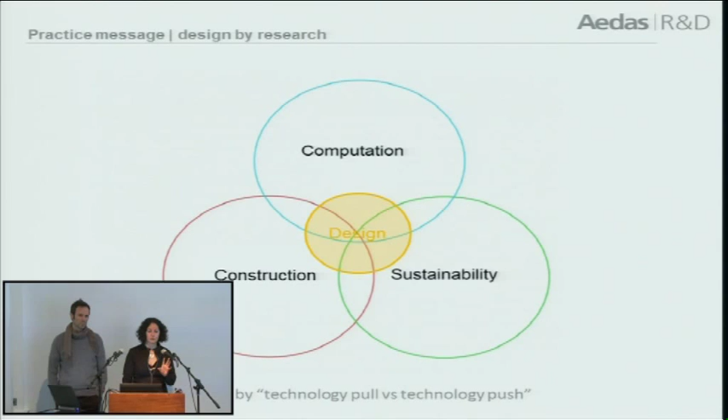Our sphere of expertise was very much based on computation and computational design, which Christian is leading, and sustainable design, which I took a strong interest in, and construction and fabrication, which we're both really interested in. We always end up working somewhere in between, and the most interesting bits of work we've done tend to be in the overlaps of these.

A very early project I did many years ago was the Dubai Metro geometry. You may have seen images of this project. Parametric modeling is my background in architecture, and Hugh Whitehead, sitting in the back row, who's been a great mentor, would probably see a lot of influences in that.

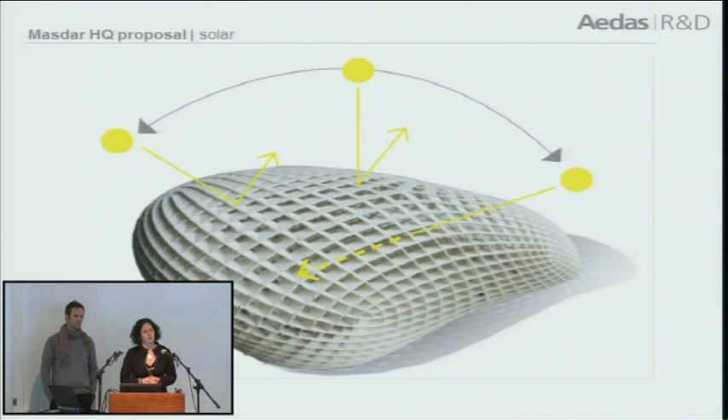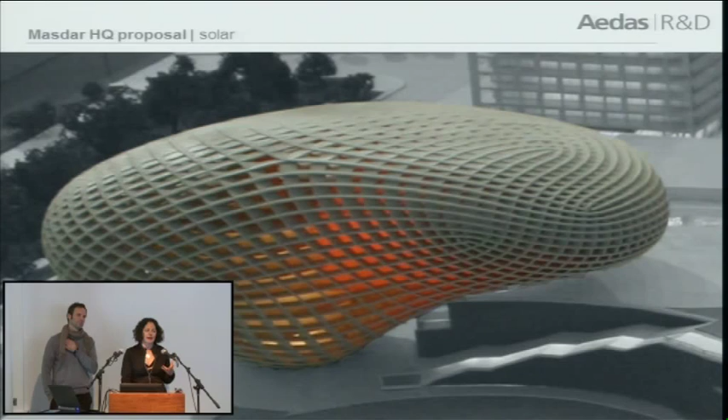That was a project we worked on in 2006, and since then we did a lot of work on building envelope. You'll see from these examples that the allure of a sculptural form, and then looking at how that performs, has been very much the focus of our early work.

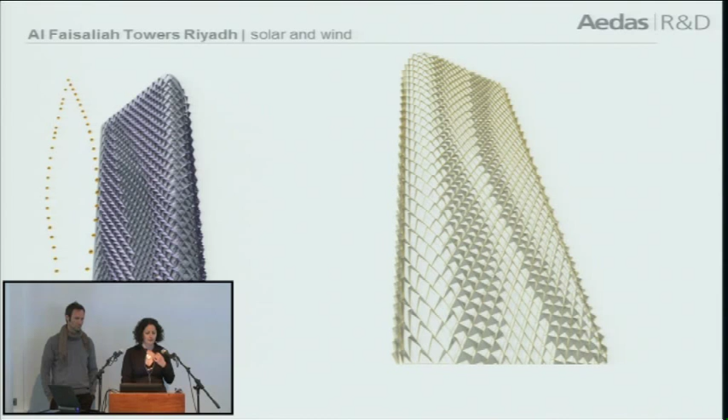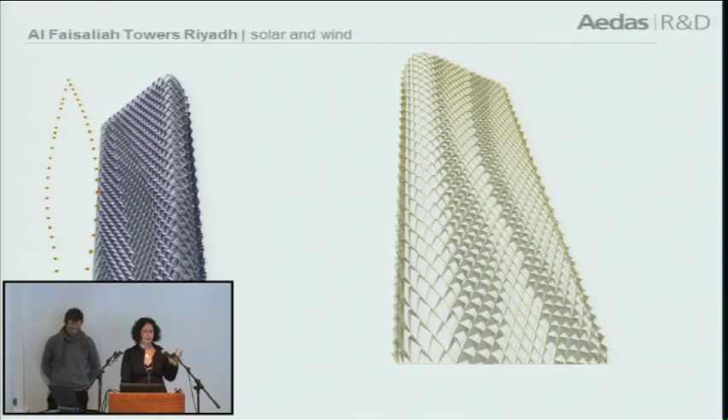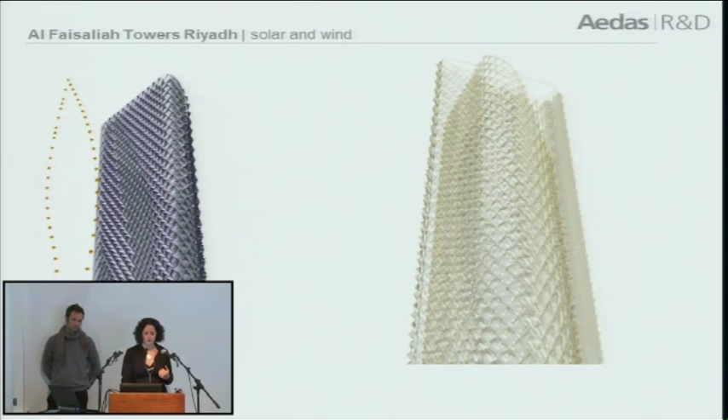Another example: working in Saudi Arabia on a tall building, we wanted to make the facade in a form that actually draws the prevailing winds into the shading system, because doing double skin facades in the Middle East is a bit tricky. We began working these sculptural aspects into the building envelope itself.

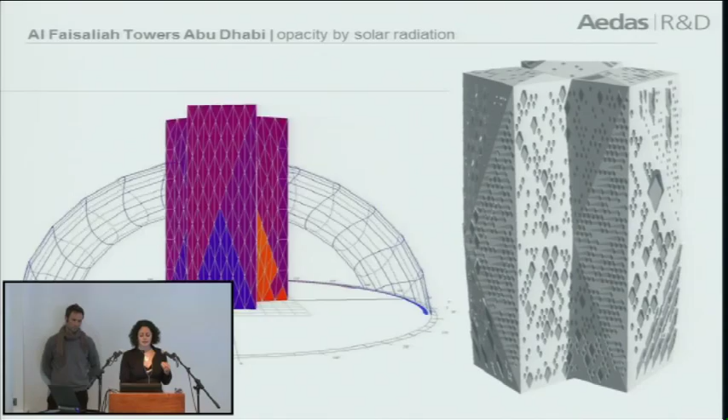We also wanted to look at solar radiation and actually drive the distribution of percentage openings around the building facade by the amount of solar radiation that particular facade is going to be subjected to. That was a building in Abu Dhabi.

When I worked on the Karachi Port Trust Towers, it was the first time I really wanted to know how much we were really saving by all this effort. We were making a huge amount of design effort—are we really saving anything, or is it just adding to the character of the building?

If I go back one slide, the thought that a parametric model can give you feedback about wind performance, can help you optimize the geometry, structure your data in a helpful way—you can do your environmental analysis as well as your physical prototype.

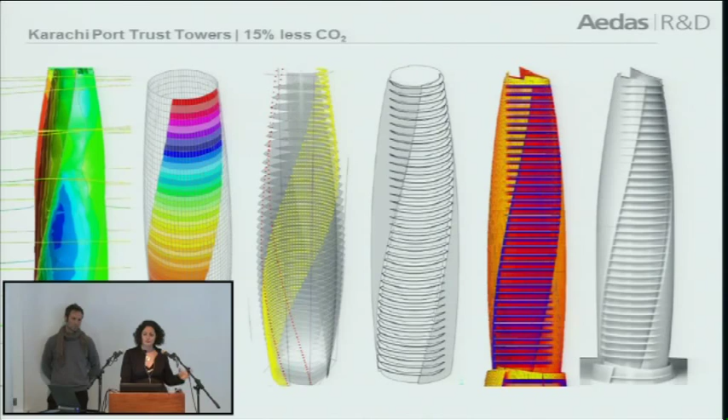So, 5 years ago, this was quite interesting. But being able to tell that it was going to save us 15% of our CO2 emissions was actually quite forward-looking. Al Bahr Towers, which is due for completion this year, was quite a bit more of a challenge.

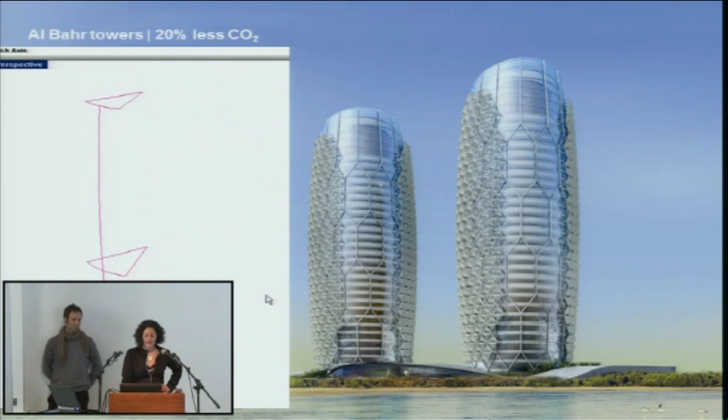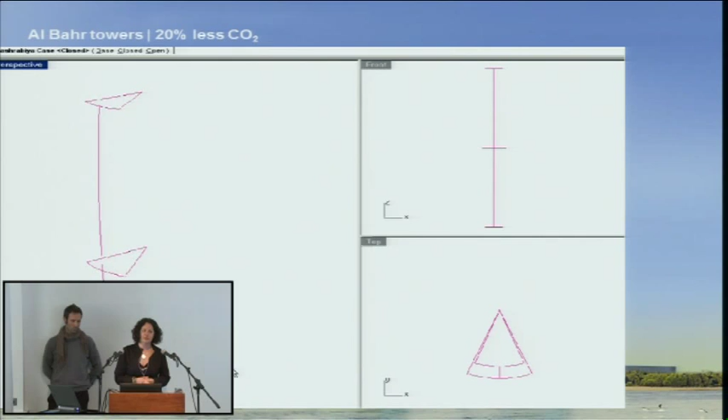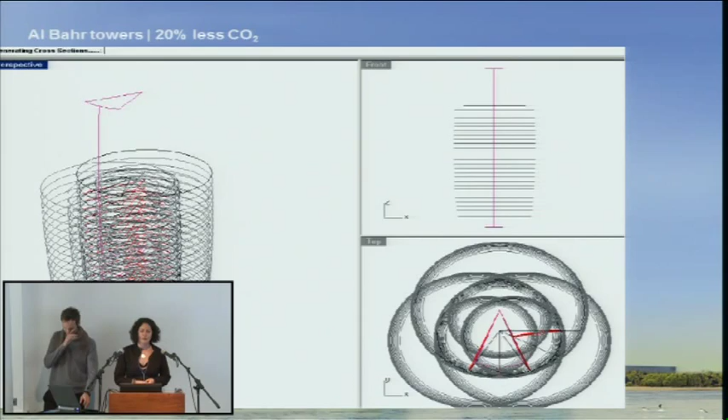You'll see from this animation, again using the parametric tools to structure the data about the building geometry, its efficiencies and the rest, so we can output this information for smooth production. We would never have been able to get away with building this building without the pure geometric control of the shape and being able to communicate that really fast.

I'm sure many of you have seen these types of parametric models since, but it was certainly a big step to actually produce the building, to drive the fabrication process from this model.

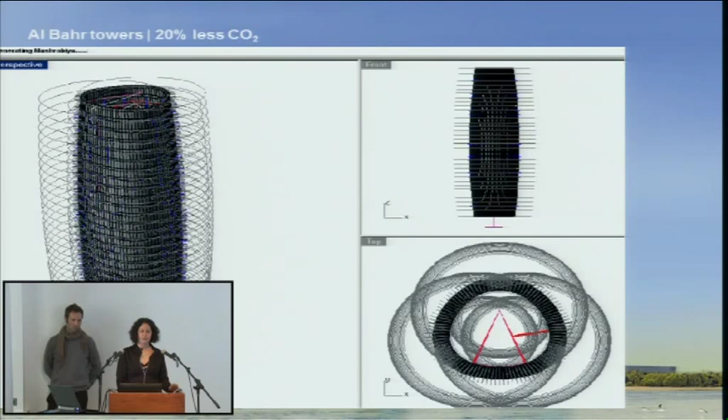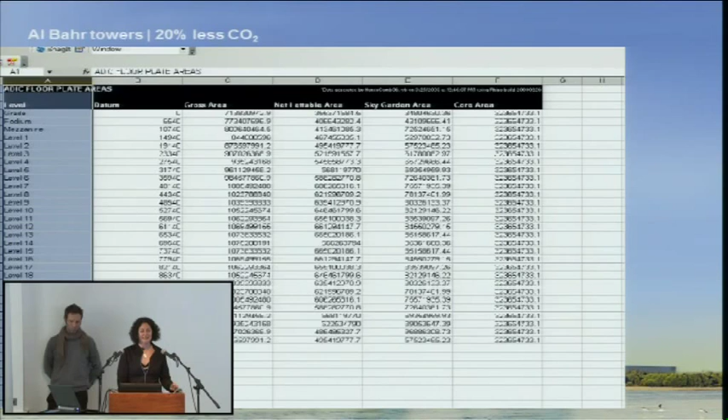The thinking behind the design was that the client very much wanted a transparent or glazed facade, and we were very keen not to end up with a glazed facade that is black or very dark, highly reflective, so that you have to turn all the lights on.

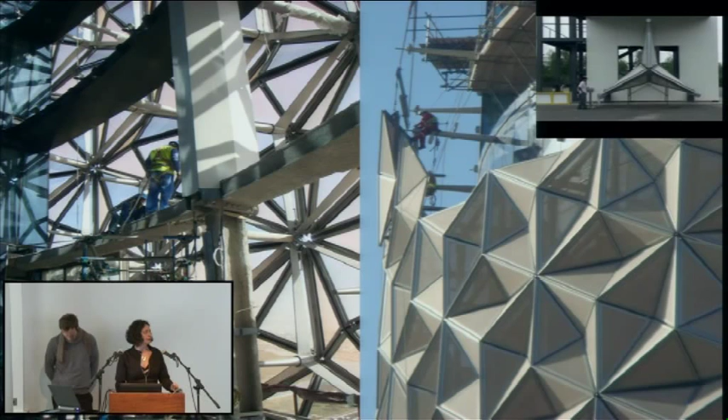Abdulmajid Karanouh, the lead designer of this project, a colleague of mine, has gone to huge lengths to make this happen. He's come up with a geometric louver system. You'll see in the corner the little animation of the prototype there. It actually changes shape depending on the solar angles. The aesthetic effect is that you can actually see through the mesh quite clearly from inside, whereas from the outside it looks rather solid.

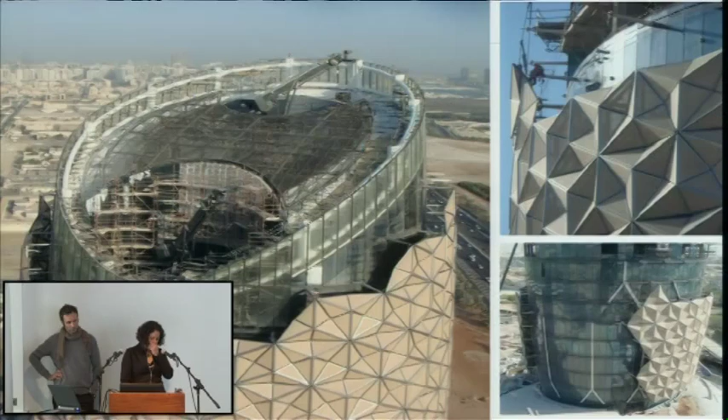And some of the recent pictures from the site. The animation is not running yet, so.

So one of the thoughts we had at the time was, if we invest so much effort into the building skin... water. Some water. Sorry, I've got a cold.

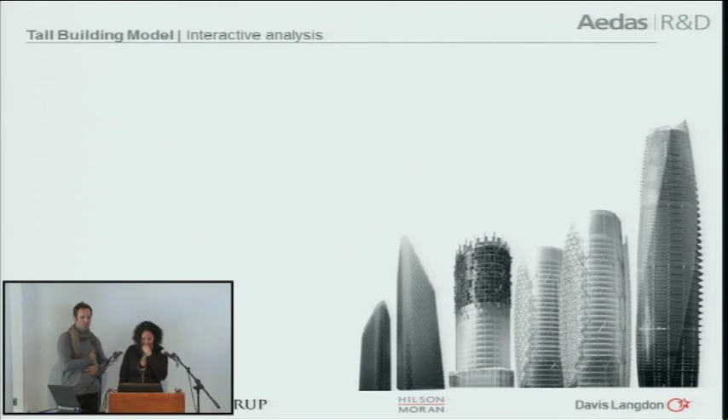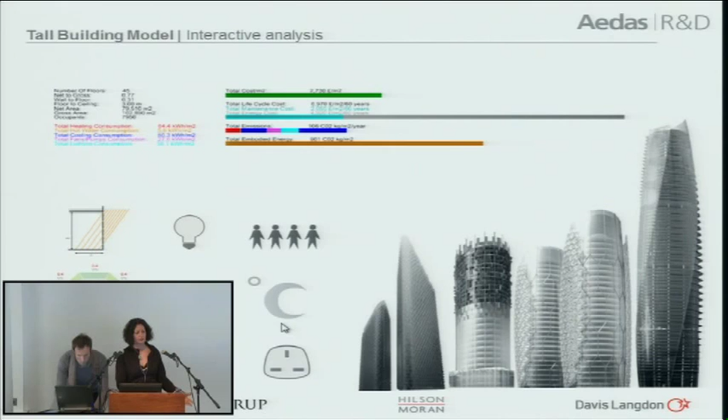We'd really like to have feedback not only about the carbon emissions of the building, the energy consumption, but contrast that with the embodied carbon, shown in the bar here. And then we'd like to see how that compares with the capital and whole life cost. We've devised a model, shown before, the parametric tall building model, where you can change floor-to-floor heights, facade specification, complexity, lighting strategy, occupancy, set points, etc., and get very rapid feedback about all these factors.

It was a collaboration between Davis Langdon, ourselves, Arup, and Hilson Moran. What you saw there was us having to map the complexities of all these disciplines together. Normally when you make a model, you send it off to a consultant and wait for the response. By the time it comes back, the conversation is over, decisions have been made, and it's much more expensive to revisit those points.

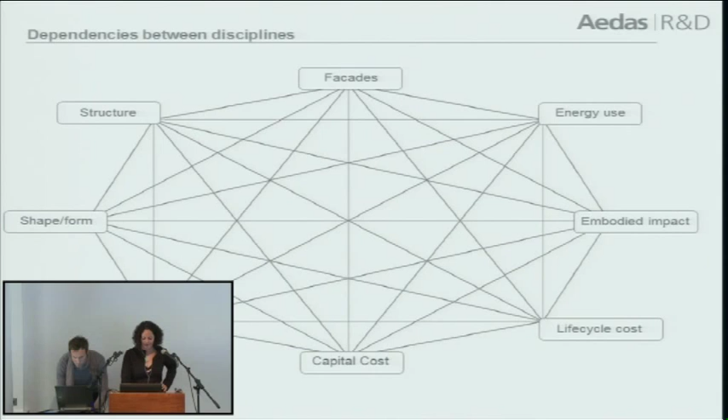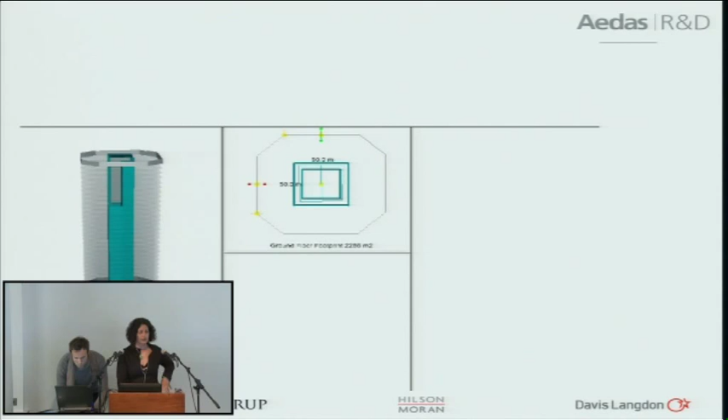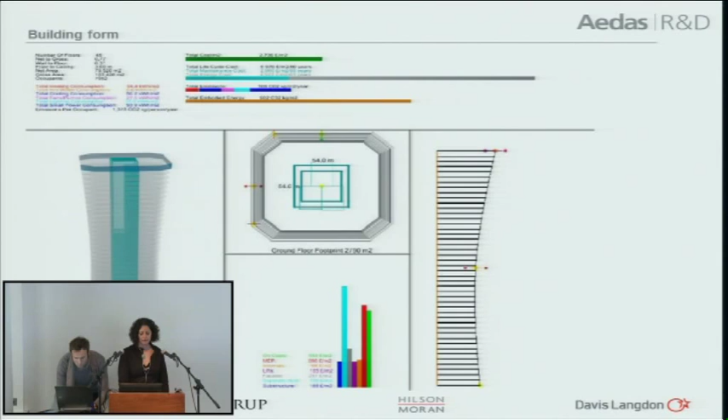Downstream, so we wanted a model that gives us the ability to make early stage briefing decisions much faster. You can put in the footprint, and the model then generates an extruded shape, which gives you the usual outputs, based on real quantities. You can change the shape of the building, change the height of it, and see all these parameters update.

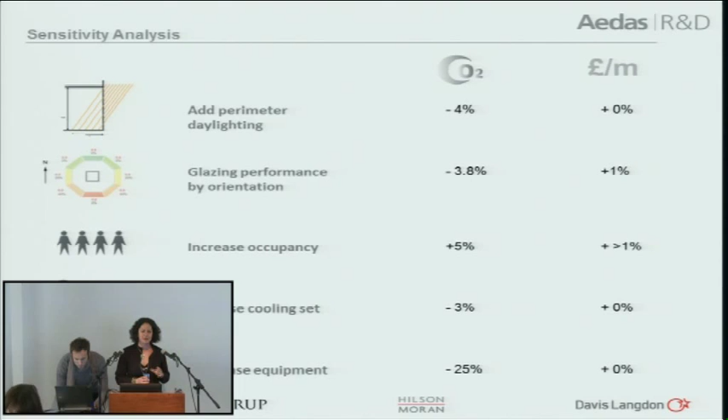You get an idea that proportionally, for example, if you add perimeter daylighting, you can reduce a certain amount of carbon emissions per annum. Doing the glazing performance by orientation rather than the same cladding all around the building, occupancy, the cooling set point. What was really interesting to me is when we incorporate what we call unregulated energy, the appliance loads, you can save a hell of a lot more.

And then the value model. Someone developing a design for sale will be looking at very different indicators than someone developing for an owner-user, as many of you may have come across. And when a project is funded by government, the most important driver should be what additional value that building brings to its neighborhood.

And very often, when we work with clients developing for sale, we're trying to bring more of that downstream value into the project. We did a very interesting project with Stuart Lipton from Chelsfield, with the same partners, evaluating the whole life aspects of different systems.

I'm not going to talk too much more about this, but the easy answer is which system basically has the biggest advantage in terms of occupant comfort, adaptability, net area, capital cost, whole life cost, embodied carbon and operational carbon.

We're really beginning to set up this workflow as a result of these projects, where we can evaluate these aspects much faster than we used to, using computational and other techniques.

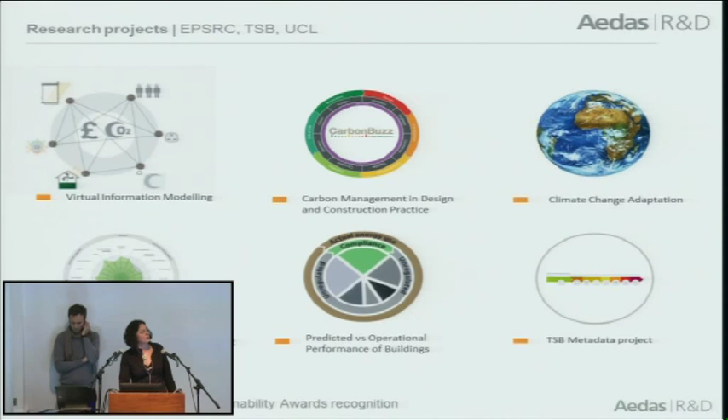You'll see the research projects that have arisen out of this line of investigation. We're working with the EPSRC and the Technology Strategy Board and University College London on virtual information modeling, carbon management in design and construction practice, and climate change adaptation. I'm going to talk about a couple of these.

One is going to be Carbon Buzz, which came out of this really intense focus. The incredible effort we put into these buildings to achieve real low carbon performance - does that actually happen further down once the building is complete?

Having set up this platform in 2008 to allow people from both the architecture and the broader built environment profession to gather and publish data online, what you can see is that buildings' compliance calculation or initial estimates of energy consumption tend to be less than half of what the buildings actually emit in terms of carbon in operation. That was quite a shocker, because we do all this work on different parts of the building, but how can we really gauge whether overall that's what matters, and how accurate are our assessments and predictions?

One of the focus points of the Carbon Buzz project is to identify the risk areas that stop buildings from working the way we expected. For compliance, you look at a building and benchmark it against a building with fixed operating hours, fixed number of occupants, and a very specific building fabric. You ignore everything about what happens downstream - is the contractor going to install the windows you specified? Is your air tightness going to be what you expected? Is your ground source heat pump really providing 40% of your heating, or only 2%, as we've seen in some examples?

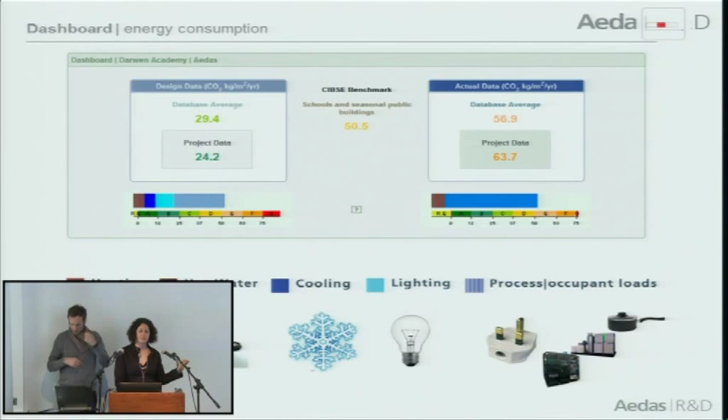For example, Darwen Academy was a really short study. The predicted versus operational energy consumption is not too different, but you'll find that with a very short study of a building, it's really hard to establish where the energy is being spent - on heating, hot water, cooling, lighting, process loads, or the rest. We would like to get to a point for every single design project in the practice where we establish this prediction a lot more accurately with all the risk factors attached, as soon as possible in the design, and work with our clients to mitigate those risks.

Another building, Loxford School - you'll see the prediction was a fraction of what we ended up with in operation, almost 3 times higher. There are some very good reasons for that, including the ground source heat pumps, which only supply 2% of the energy. And then there's the question of how you communicate this information to school children.

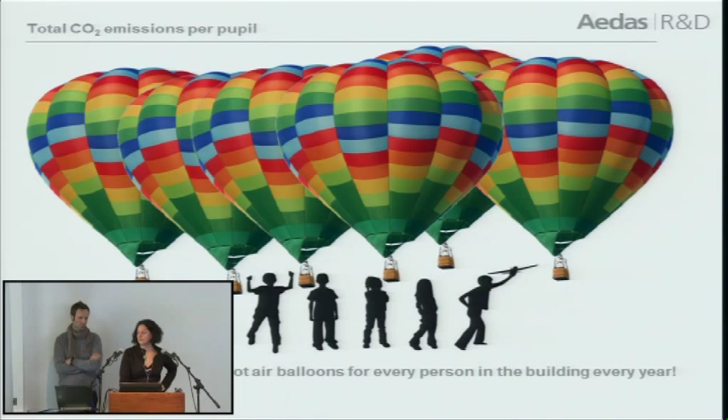I just put up this slide because it's a completely different type of conversation you would have with building occupants, showing some of your engagement work. It's really fun.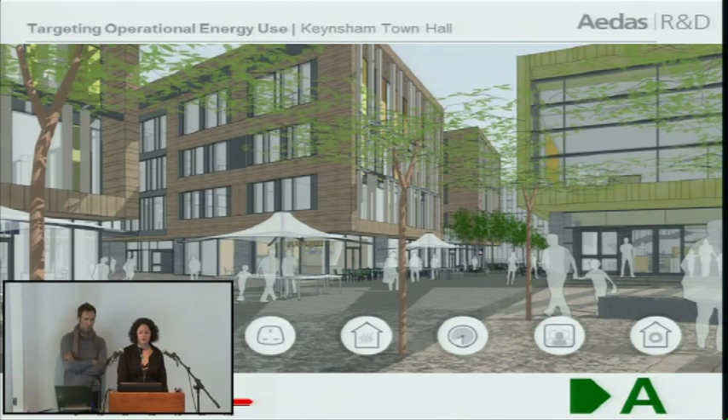In this case, we had a relatively easy time because we worked with a client who was very well informed, and they were the end users. It's much more difficult to do this when you work on a speculative project.

And you've heard me talk a lot about carbon, and Christian is going to talk about other things, not just carbon, when I let him put a word in edgeways. But the value of low carbon buildings - we know that regulations at the moment and design standards don't really contribute to the building's actual market value.

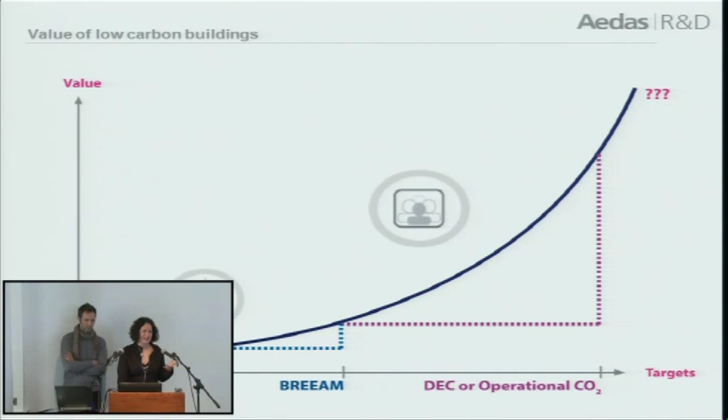But we don't know whether that's because the badge doesn't help, or because we haven't actually achieved operational low carbon energy in use. Most of the buildings we are studying, and also the building performance evaluation program, shows that the discrepancy between predictions and operation is really large.

So this thought of thinking about buildings as more of an ecosystem of fabric, services, equipment, with the occupant, the user, at the center of this. People do completely unpredictable, unexpected things in buildings, and we just have to build structures that are resilient to cope with that.

One of the things that a group of architects came together as part of a big event at our practice was we all thought, well, we must be able to design out building management systems somehow. None of the education buildings being studied under the building performance evaluation program have a building management system that really truly works, which is a bit of a shocker.

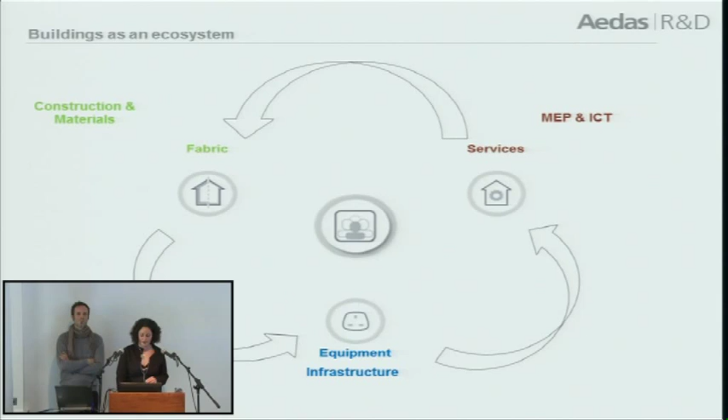So I'm going to leave you with a little animation, if it comes on, about doing things that aren't necessarily just about energy use, but studying what...

This was a little sculpture we did as part of last year's Smart Geometry program with Josh and Peter Feldman and lots of other people in the group, where we monitored the level of activity, so the intensity of the activity in different workshop clusters, and these things change shape based on how intense those activities are.

And that's it. Sorry, Christian, over to you - they're very patient. Let's see, we have to... it's okay.

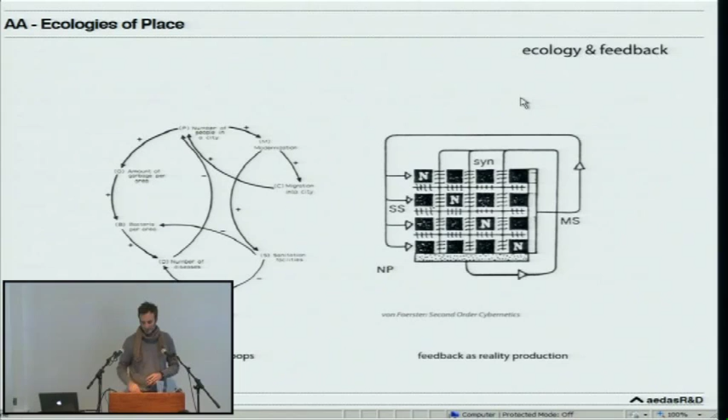And von Förster even went as far as saying that the whole set of realities is this idea of many feedback loops affecting each other - feedback in the sense that there's an ecology of feedback, an ecology of relationships to each other.

In an architectural sense, in a built environment, you could see that not so much always as the idea of structural systems, but in our perspective, the focus is the idea of the configuration of space and what's the ecology of the configuration.

And I mean ecology here because we have a lot of theory about the idea - amongst them here in London, in the UK, Bill Hillier with the idea of the syntax of space, or as he described it, space is the machine, all based on the idea that behaviors within the building are more or less down to its configuration, and the configuration or the behaviors are mainly based on movement or permeability structures.

Before Hillier wrote Space is the Machine and then The Social Logic of Space, they actually wrote the space syntax paper, which was meant to be a generative theory of design, based on 8 or 9 types of syntaxes, which all have to do with how to configure spaces as a mutual, or dual, representation between people occupying and producing space, and space affecting people again.

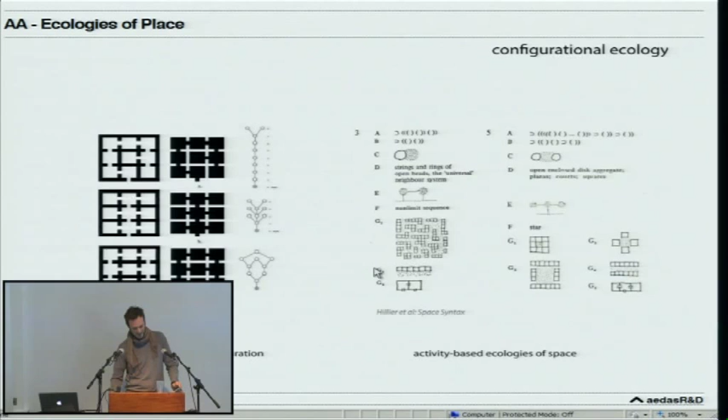This idea of Maruyama's feedback isn't necessarily explicit in design, because we can't necessarily design this feedback—we can only try to understand it ahead of it. So it's an activity or occupation-based ecology, if you like, between the geometry itself and the user. That produces types of local phenomena which are dependent on a global performance, which, according to configurational theory, depends on the permeability structures—how you get around and what you see when you go around.

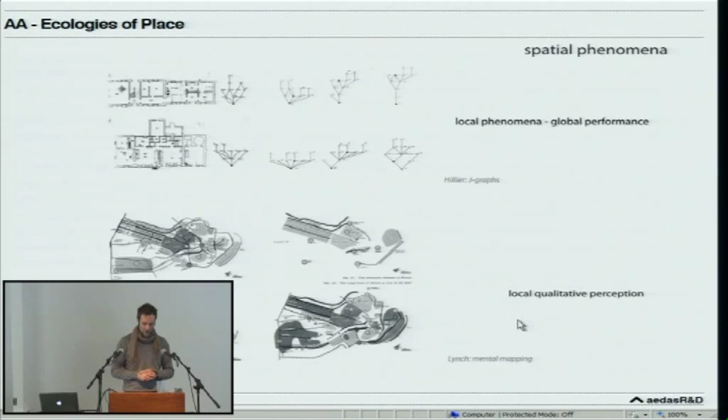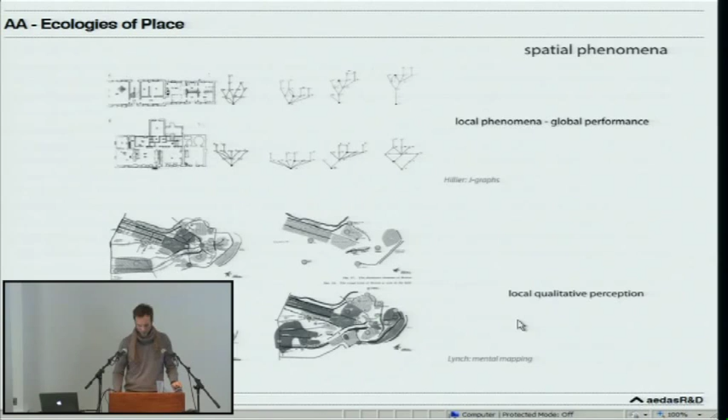It's becoming more intense and rigorous nowadays. We're not just looking at movement anymore, but also other perceptive qualities of space. We're going as far as simulating some of Kevin Lynch's mental mapping through associative maps, which we sometimes use for more narrative-based planning, which I won't be able to show here today.

In the planning environment, it's interesting that the UK—maybe one of the few countries in Europe, or worldwide—has moved away from writing design codes as rule sets. After the disasters of the 60s and 70s, where it was very parametric, they've moved toward specifying guidelines for what they call principles, or as the By Design guide would have it, planning objectives. How you then implement and arrive at these planning objectives or design principles is often not very discursive or explicit.

We experienced that firsthand, and it gave us a bit of a shake in 2007 when we did this project for Urban Buzz called Smart Solutions for Spatial Planning—beautiful name, not very good—working with various planners, regeneration officers, and urban designers.

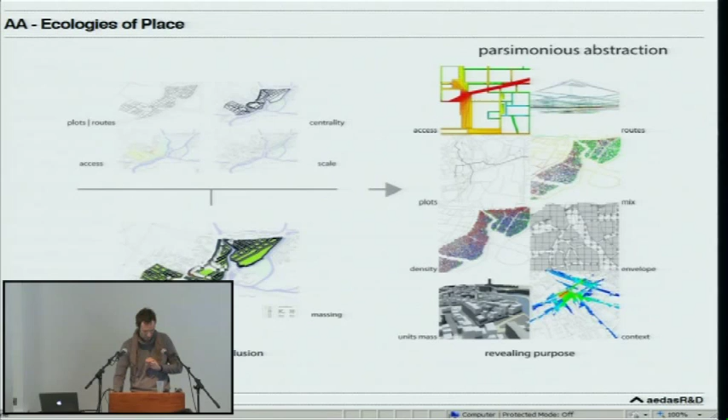So ever since, we're extending what we call on the one hand the digital master planning platform, and on the other hand a framework or platform of many very small, parsimonious simulations that only ever try to do one thing at a time, never more than one, because then you don't see the purpose of the application and it's very difficult for design to participate.

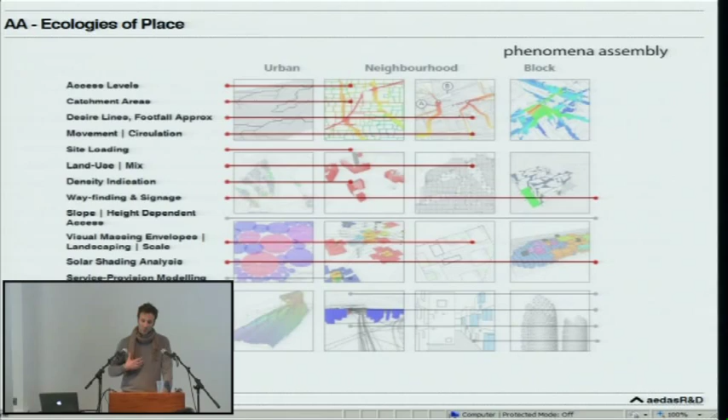So at this point, because I only have one minute, I'm just going to go very briefly into a couple of applications. Well, actually I've written down 5 applications, but I can only run one. I won't talk about the project itself, so that you maybe get a little bit of an inkling.

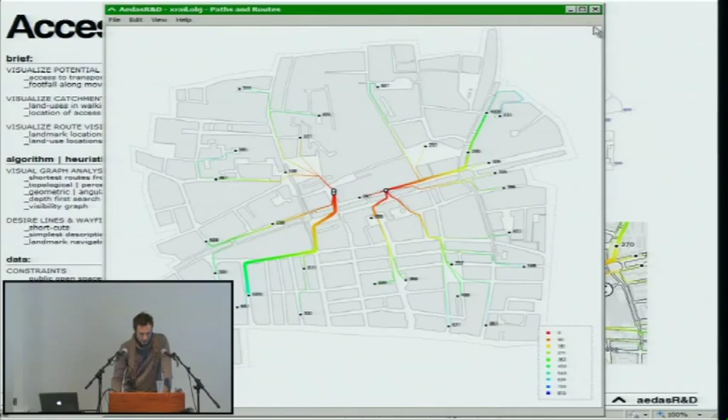From a movement perspective, we wrote a series of applications back in 2007 and 2008. We were then approached by the Crossrail consortium after they'd seen what we've done, because they realized that when they usually work with their consultants about routing and pedestrian flow, all they get is tables and access data, so footfall at certain points. So what we tried to do then is use some of these algorithms we work with and whittle it down to one type of behavior.

You can see here these were actually station entrances, so they had to try to find out in Whitechapel where the entrance should sit. And these are the sink points, meaning where people go to, taken from interviews that we conducted on site about where people come from during the day.

So we're doing the observational studies ourselves. You can then see, from certain points where people come from, you can seed them and give them how many points they need to reach. The colors indicate the distance, the width indicates the footfall, and the lines themselves are calculated by different types of criteria.

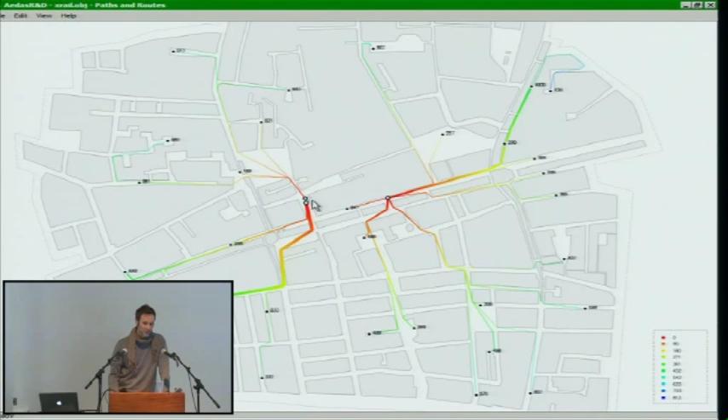So this one here would be: okay, if you're in the morning, everybody knows the site and there's rush hour, everybody runs to the access point of the station. These would probably be the shortest routes, i.e. how is our urban environment then occupied by choosing these locations for the routes? Or which entrances, as you can see, are not relevant, so I can actually take them away.

On the other hand, this is Whitechapel Market during the daytime, where we're going to have a lot of tourists coming in. They're going to use different routes. So at this point, I would actually have to find new ways of placing these departure points. But the routes become different types of definition through the environment because of the way that we read space the first time we go through it. It's called perceptive depth rather than metric depth or distance.

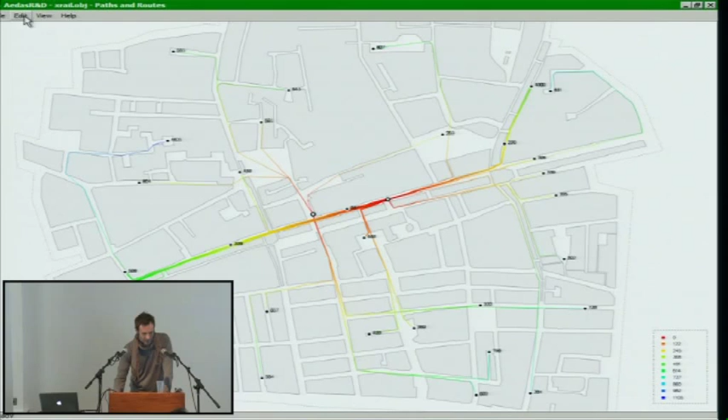So you can see how the city is going to be occupied differently from that type of scenario during that type of day. And sometimes I just like doing this for fun. You can see a little bit that the complexity we always talk about can actually be somewhat seen, if you like.

If you actually see the structure of the space, you can also see the relationships between the entrances. There's not much going on over here, depending where I place them. And I can see how my whole city changes its occupation.

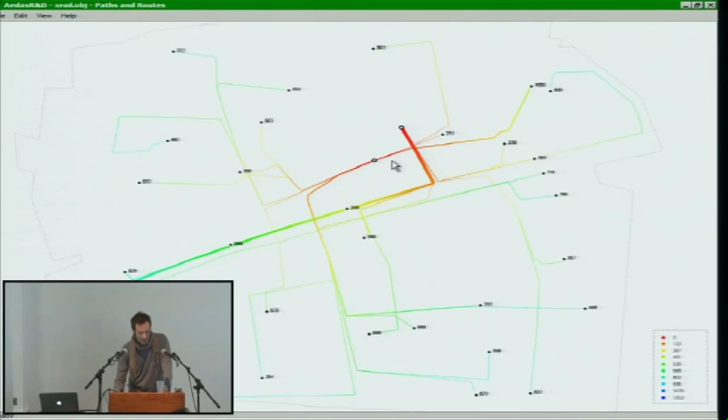We take that then into, of course, you can do that in 3D. So we did that for Masdar in 3D because people need to be walking in cool spaces rather than hot spaces. But what we're trying to do more from a perceptive point of view in using the space...

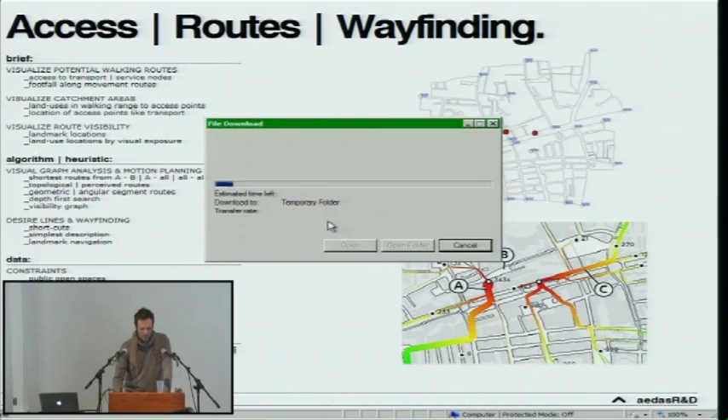We're also then analyzing, once we have looked at the routes, what people see as they walk along routes. So this is again a simulation, and none of this is ever recorded, what we're doing, so it's always live, in order for you to be able to interact with it and work with it.

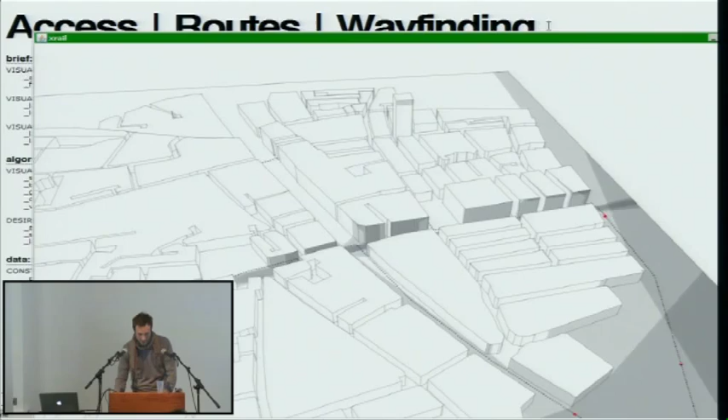What happens here also has several consequences. Underneath, it's actually building up a gradient map to show what is being seen, how often, which building, which elevation, for wayfinding, but also for allocation of land uses. Mainly these two points, but also in this case it was very important for informal crossings, where people would like to cross the street rather than where the crossings are allocated. So it becomes a whole series of issues that we break down so you can see the calculation or the behavior of the application.

This can then be transported if you want to go more abstract, which is currently not really the case yet and we haven't really used it too much. But you can see something like this, where you can try to understand.

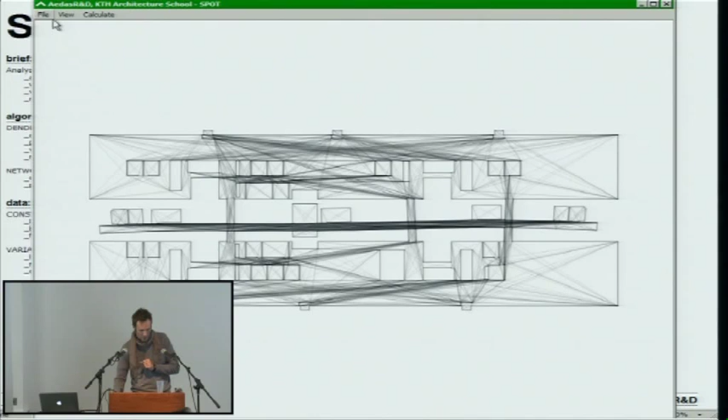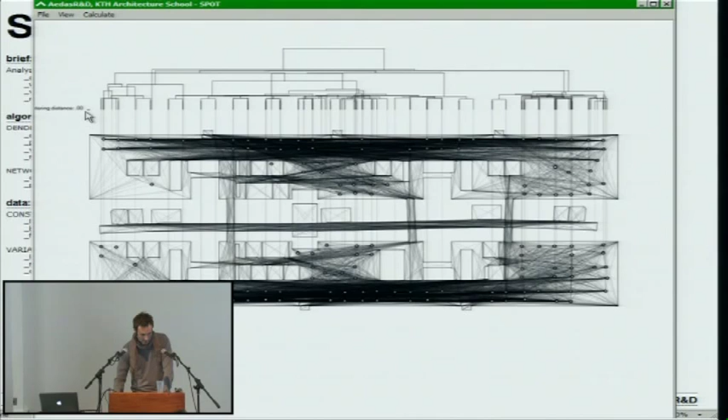This is a post office building in Sweden, and we start to analyze what groups of people, according to distance, what they see, if they see each other, how far they sit away from each other, and how they get to each other by different types of route evaluations.

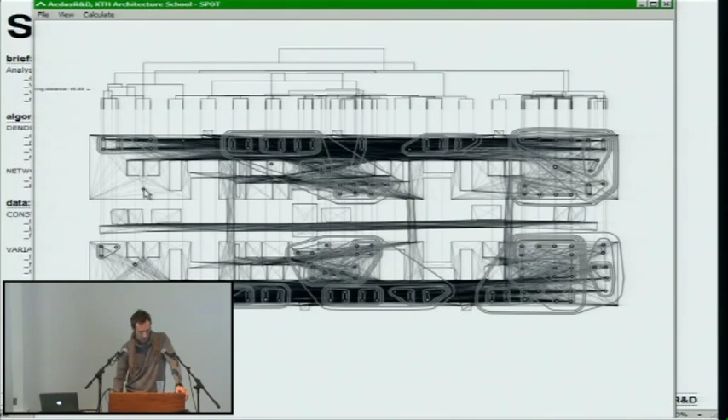So in other words, three types of behaviors, how they can actually interact—what types of groups might be interacting with each other. So nowadays in workplace consultancy, there's some guy sitting here all by himself, so it's not very well placed, if you have certain radii of interaction that you need to adhere to.

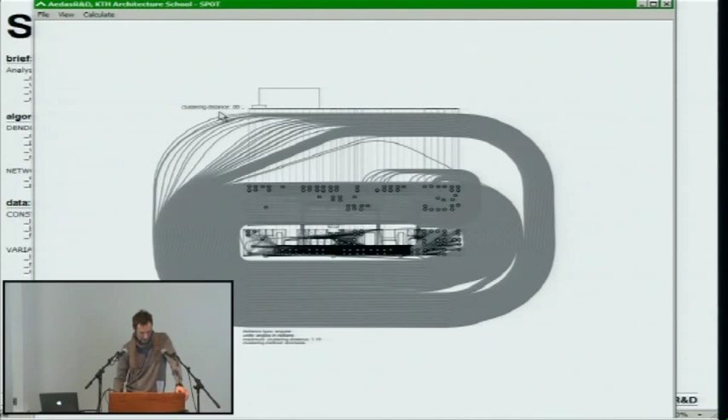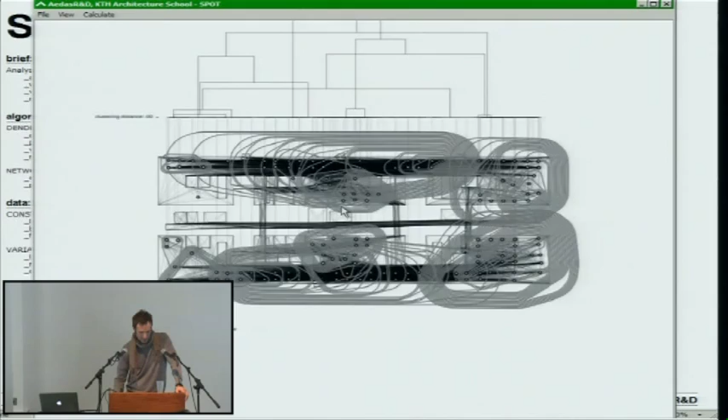What's also interesting about this is that you get a completely different result—this wasn't so successful here, I need to get a different cluster for that—so you also get a different type of, how would you say, how the building is mentally partitioned. That's what I mean with Kevin Lynch in that sense.

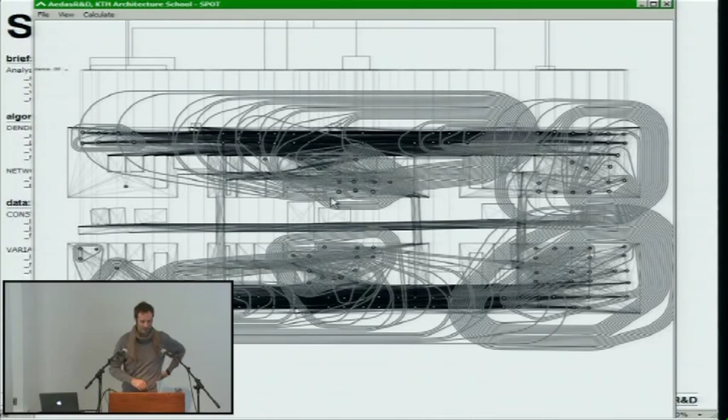We can actually try to get to some of the criteria of behavior and perception that make us understand how we think the building is partitioned. Is it vertically partitioned as we see in plan, or are there other horizontal pockets in the building that we don't see in plan, but that derive from other behaviors not purely in the geometry?

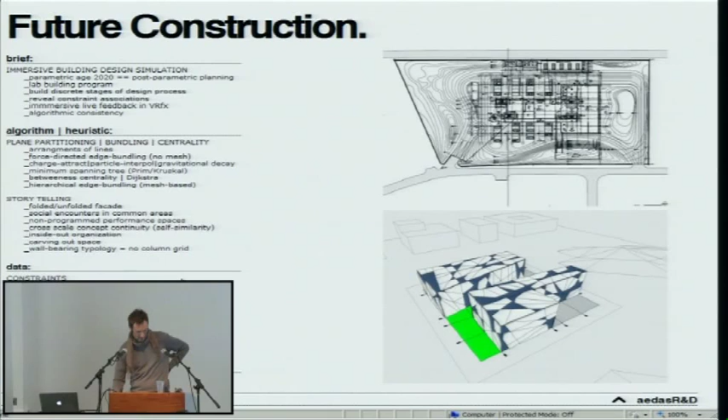These types of projects can be taken forward. We just did more speculative work for a German research institute, where we say if you take these behaviors into account, and if you had to plan a space from inside out according to these behaviors, you can surely find algorithms and ways of planning where you take the movement structures into account first, with your functional areas being able to carve out around that.

So we can see how the movement structures in 3D try to bundle themselves quite literally into groups, and where what we programmed as certain areas and flows of paths come together, there may be additional unplanned spaces that can be occupied in a hybrid sense. You see that quite a lot—where people meet, they may set up a shop or something like that. So we're actually starting to figure out where these unplanned activities might occur.

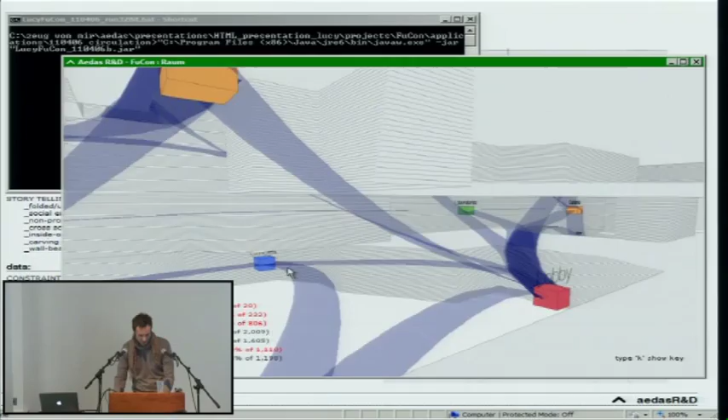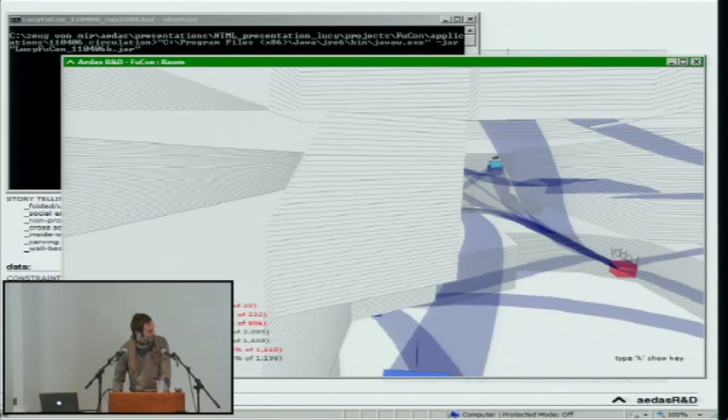Once you have your movement structure, you get a partitioning into the functional areas, which are more or less achieved here, as you can see—the areas you need to target for, not all of them, some of them actually over. So you then need to start working away at this, which you can.

You can just work in here, you can add spaces, you can copy spaces, and so you can do it actually—oops, come on, maybe I'm not very practiced anymore at this at the moment.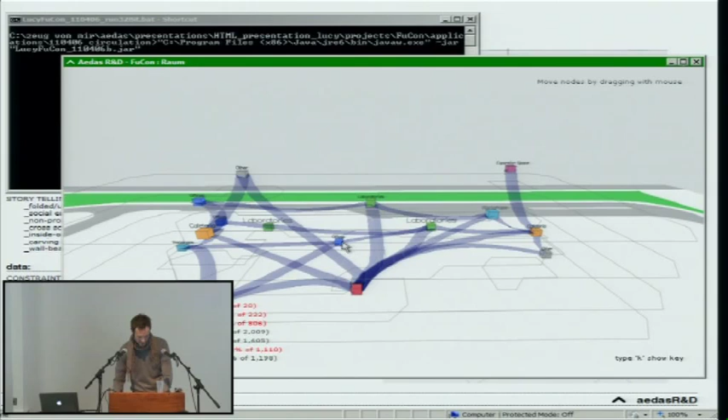This was obviously, as you can see, for laboratories. Now I've got my new laboratory space. I can link this up, and then I can tell it to be on a different level if I do it correctly, and then I can link it up with other spaces, and slowly but surely build my network between here again. It doesn't come on now.

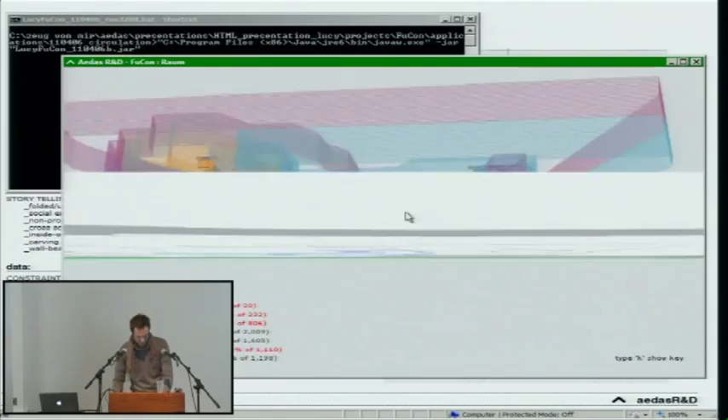But what we see then slowly is the subdivision, different types of spaces, and how this develops from a type of movement angle. Equally, you can do that then inside if you're looking at a single floor again.

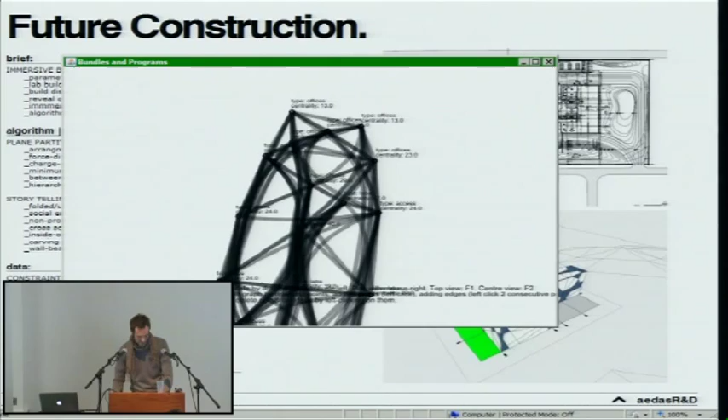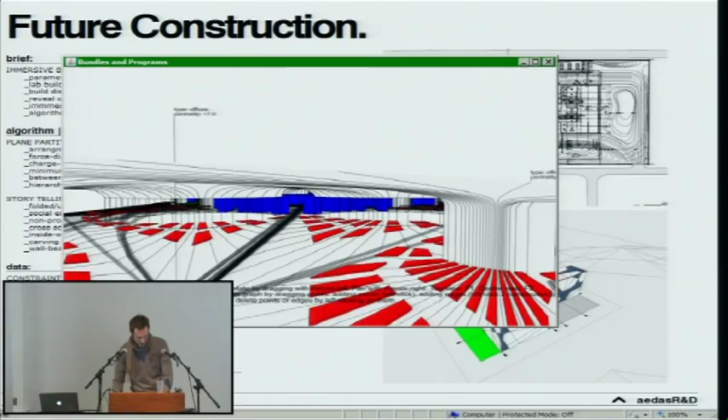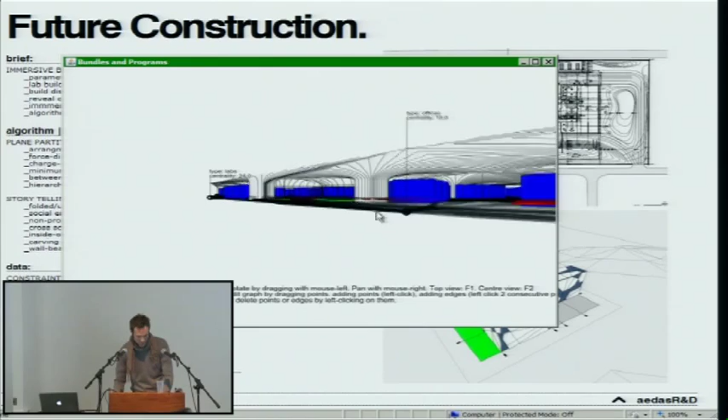They're using these movement logics, but based on other types of behaviors as well. Here we've got a furniture grid, and then you can work while you're actually inside this already proposed partition by still manipulating geometry as you're inside. The reason why I'm saying inside is because these weren't standalone, they were all linked up to a virtual environment.

So you were actually not inside a cave, you were tracked with goggles and you were inside that space. As you moved through, it would sense where you are, track you through the space, and you could say, I need more space here and less here. I can't understand why there's this path splitting here. Where is this going? So you could occupy it and design it while it generates at the same time.

So all of these bits and bobs, going back to some of these ideas of building these ecologies from various different aspects, and I showed you just one or two now, from movement or permeability and visibility, into this idea of building them from inside out, with a certain behavior of the designer being able to bring himself in rather than being at this massive simulation.

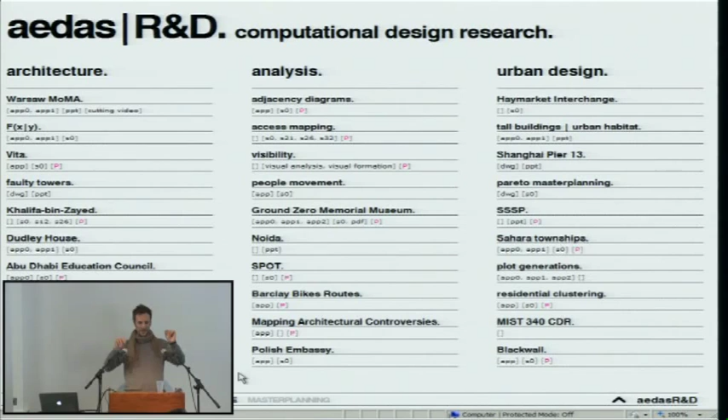That can also sometimes just be quite nice from a visualization point of view. We did this, more like a carbon measuring device, if you like, for Barclays bikes. We got the data and did this visualization about at what point in time a bike was picked up, where, and where it was dropped off when. And then we try to visualize how the city would be occupied because of where the docking stations would be allocated and how people use them.

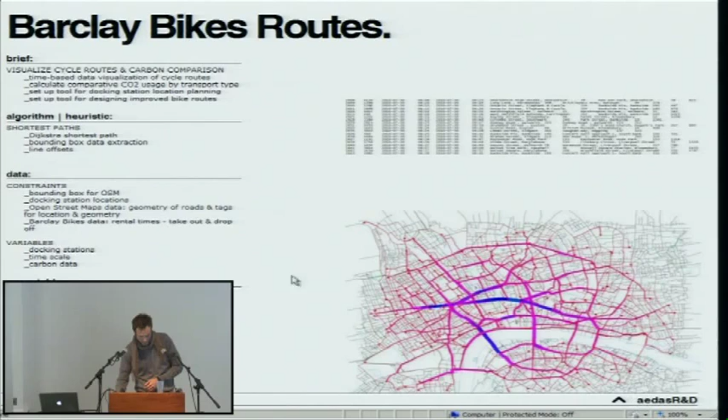You can see here an overall integration of what the main travel routes over time were, and where there's obviously a heavy load of bikes going through. But we also simulate it so you can see it per minute over 8 months, as you can see down here. And you can see how London's being occupied by these bicycles according to the data we got from Barclays and the intensity of use.

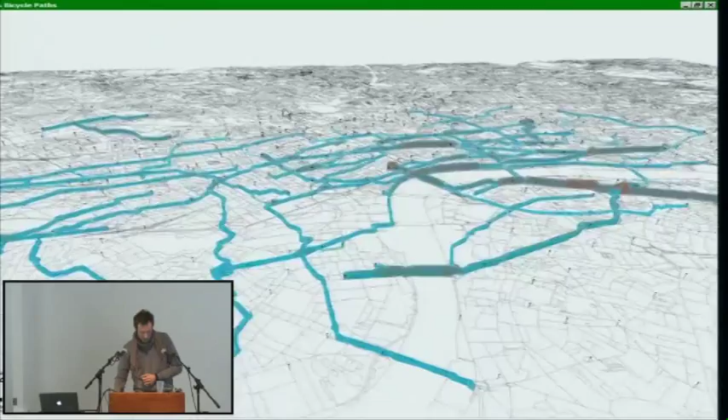And then you can see at what time of the day it's occupied, and overnight it becomes a bit calmer. Evening rush hour obviously. Is it sunny? Is it rainy? You get an indication for this. It's coming down now in the evening. You can see where the stolen bikes are because they're never returned.

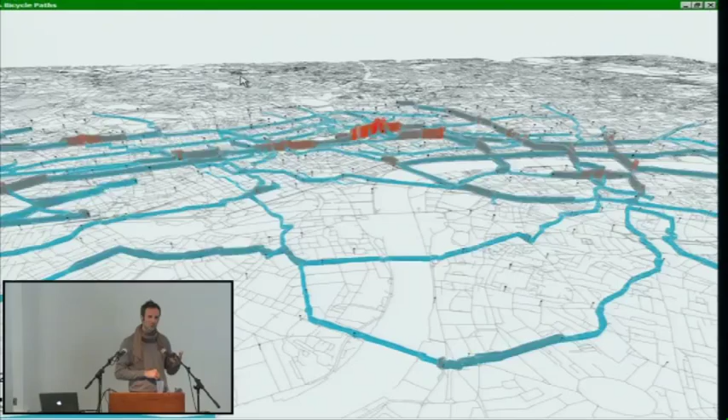The line always stays on, and you can then start to propose design interventions from here as well, because you start to see, you can start to calculate which docking stations are little used, which are much used, along which routes basically a heavy cycle is used in the city. Should you have different uses along them? Like, should you have actually a bicycle repair shop there? Or should you deviate it if it coincides with a large road like Oxford Street?

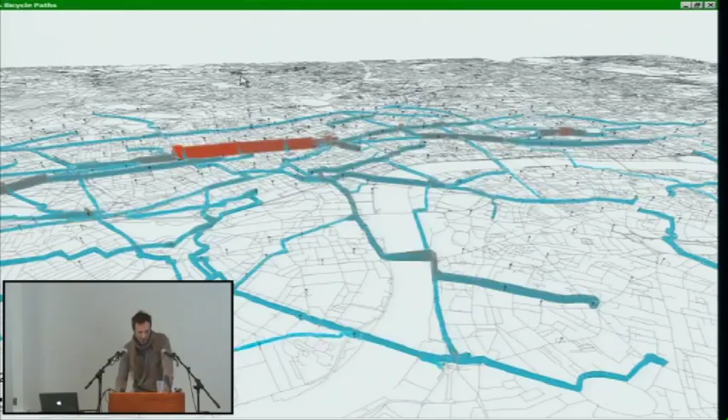So you start to have some information about, in that sense, the ecology, more of a feedback between the geometry of the city and the use of it, right? And between how we can read it and how it offers itself to us in order to design through that knowledge.

And here we did the carbon counting, of course. You can see down here we measured how many kilometers have been traveled over time. You can also count this per hour if you want, so it gets a bit more intense. And you see how many kilograms of carbon by other means or modes of transport would have been used if the bicycle wasn't used, or if the scheme wasn't in place. At that point we found out that over 8 months or 10 months, whatever it was, the use of this scheme has only reduced as much carbon as a single office block in London would produce.

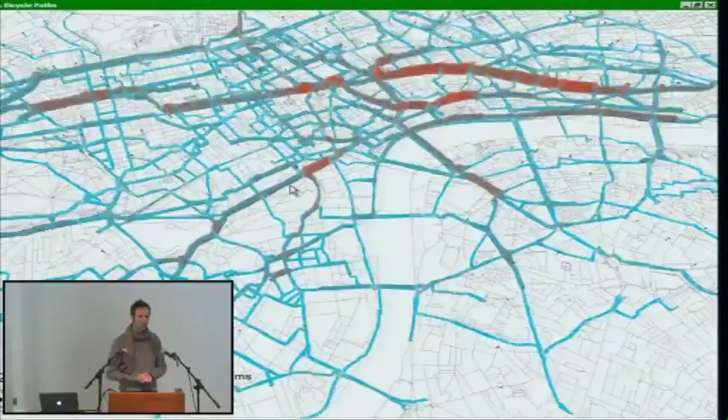Yeah? So it's quite interesting that we could say there's a problem that we think we have these placebos sometimes in place. So, oh, a cycling scheme, we're green now. But we can also see that it might not—I mean, this is of course just an approximation—it might not be as beneficial as we think, or it is very beneficial obviously, but compared to other emission objects, so to speak, it's quite innocent, or ineffective.